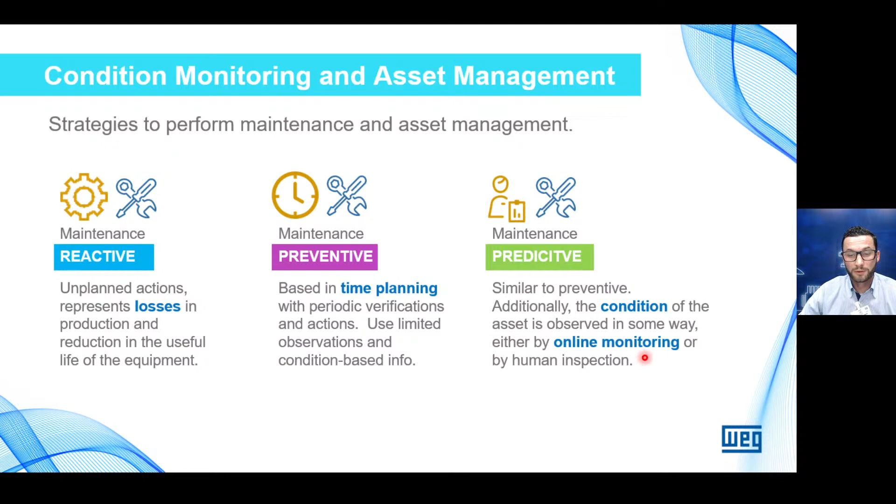Moreover, we can use the technology to perform predictive maintenance. It's similar to preventive, but we can also see the condition of the asset using online monitoring or human inspections. And the Motion Fleet Management solution is designed to help with these 3 steps of maintenance.

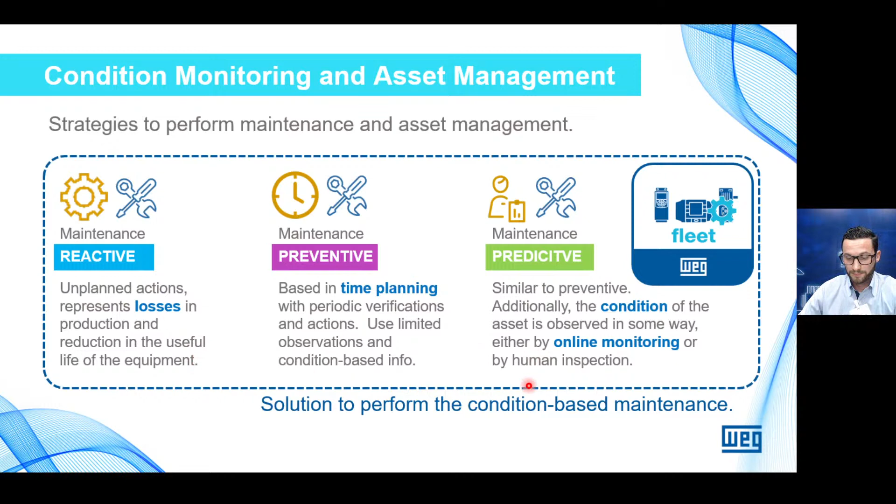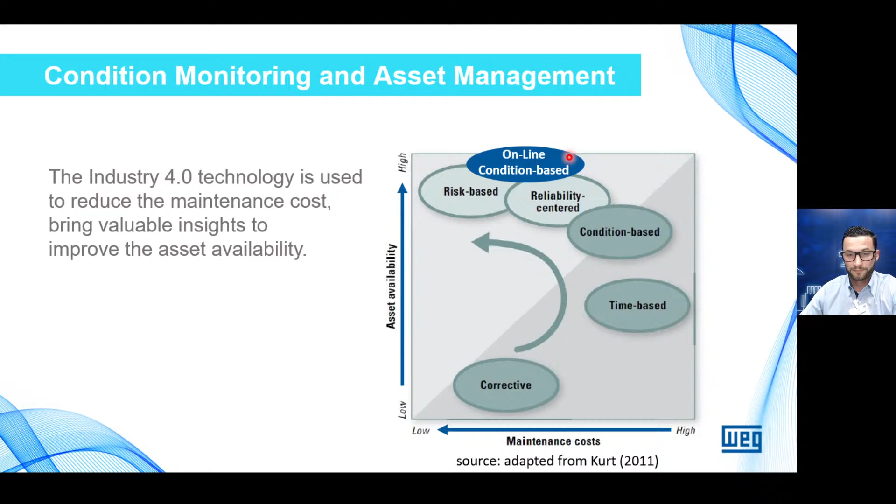Looking at the theory, when we are using technology, we are looking to reduce the maintenance cost and get asset availability. When we get online monitoring and condition-based actions, we are reducing the TCO, the total cost of ownership. And to get a better understanding of what the new technology is and what is different from the traditional methods, we would like to use this table.

When we are using the traditional methods, usually we need to take care with workforce safety. We also need installed instrumentation to get online measurements, and usually this cost is high. To perform the analysis and diagnosis, we need expert knowledge in every measurement and also in every analysis. It means this application is less generalist and more specific.

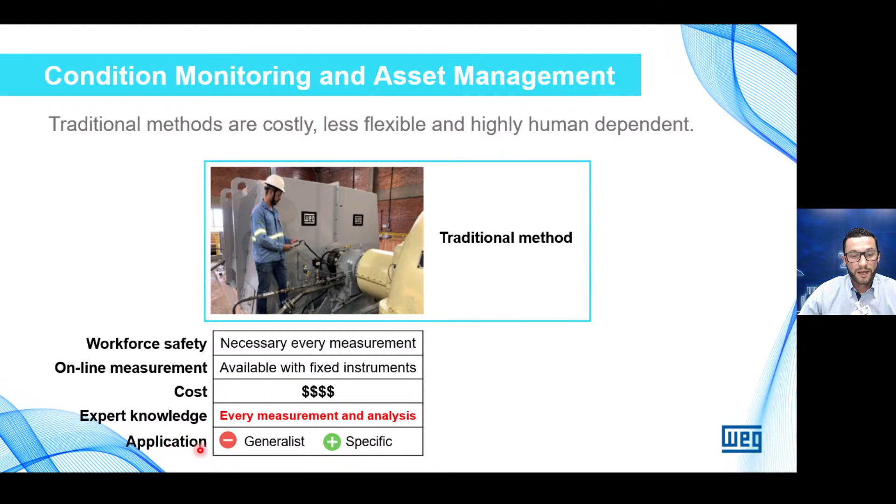Comparing with Industry 4.0 technologies, we can perform autonomous scans. The measurement is online, and using smart sensors and wireless sensors, we can reduce the cost compared to traditional methods. Here we can take advantage of algorithms, so the expert knowledge can be embedded and scalable inside the sensors and at the cloud. It means this application is more generalist and less specific. In this case, we can use Industry 4.0 technology to sense the fleet to understand where the experts and the workforce must focus.

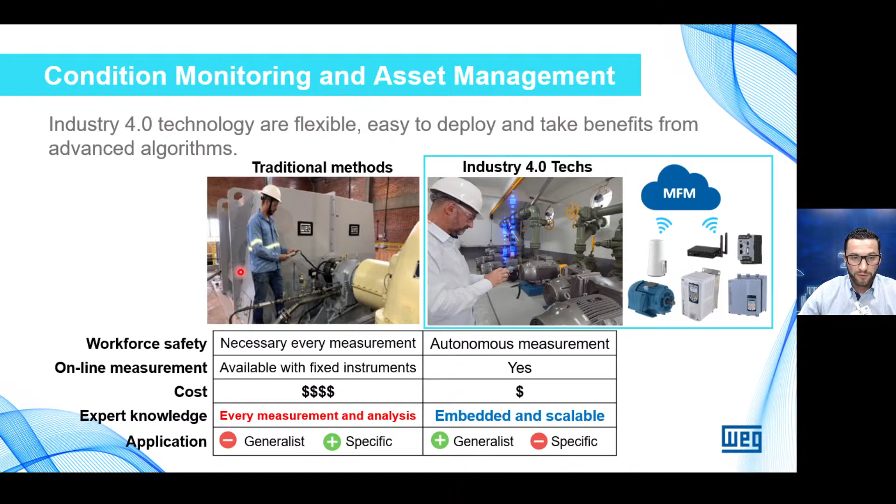So in 2018, WEG launched the WEG Motor Scan. Our customers started to use our gateway, our motor scan, and our digital solution. We improved the platform, we improved the cloud solution with the motor fleet management. Other customers started to use it and take the benefits of this solution. We created the fleet reports. We created the first WEG product using artificial intelligence and machine learning.

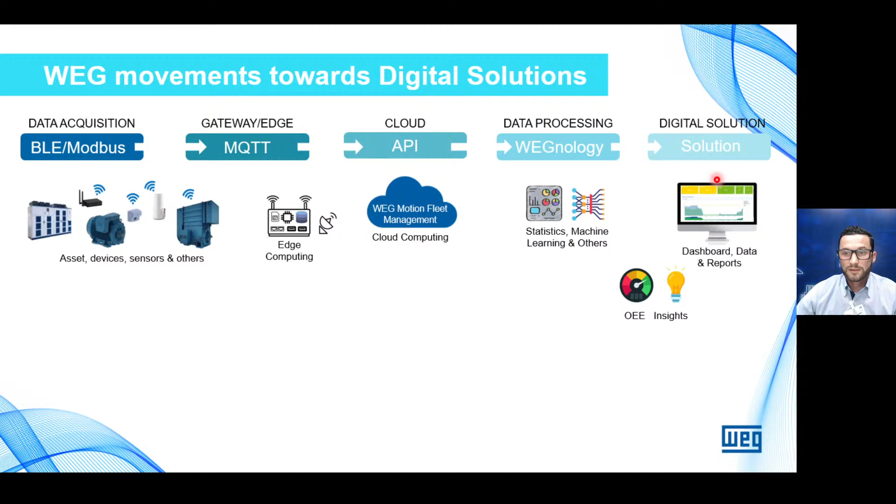So how did we start this? We know a digital solution starts from the data acquisition. Also, we need the gateways. We need to create the cloud, the data processing, and the solution. We started to create a team. So we looked first for a technical approach. And here we started to engage our team, creating new positions and getting new experts to create this.

After that, we focused on cloud, which means software and information technology. And also another challenge was created here and overcome. We took cybersecurity, data architects, data scientists. Everybody was working very hard to get this solution to the next step, to the next level. And finally, the business approach. So we have been working for the last 5 years to create this solution, to make it reliable, robust, and technological.

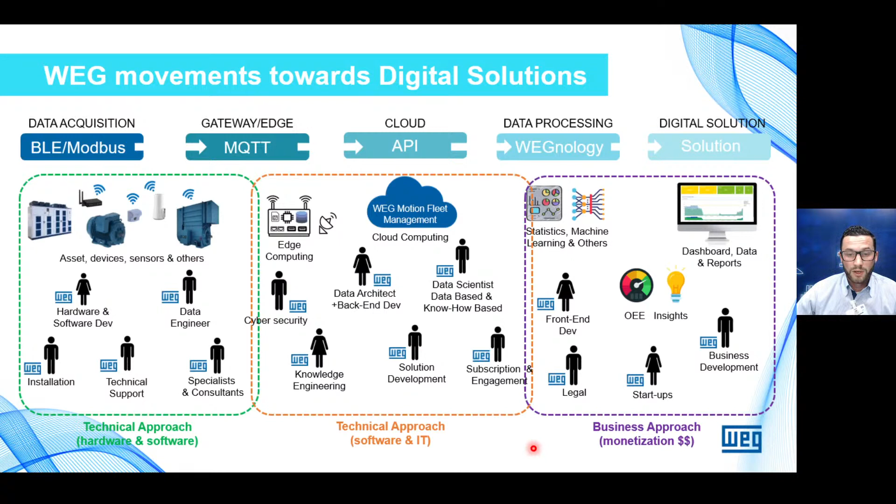And of course, we also got some technology partners outside of our company. Recently, WEG bought V2COM, which is a connectivity company. Also, we now have at the company BirMind, which is focused on analytics and artificial intelligence, MVisia, focused on computer vision with artificial intelligence as well, and PPI Multitask, which is a manufacturing execution system focused company.

So, to create the motion fleet management software, WEG decided to use its own IoT platform, which is the WEGnology. Any WEG customer can use the WEGnology to create their own solution, using some hardware available in the market to get the data and using our cloud to create the dashboards, the workflows, the data lake. Everything that you need to create a digital solution is available in WEGnology. So WEG created their own sensors and gateways inside this motion fleet management solution using the WEGnology.

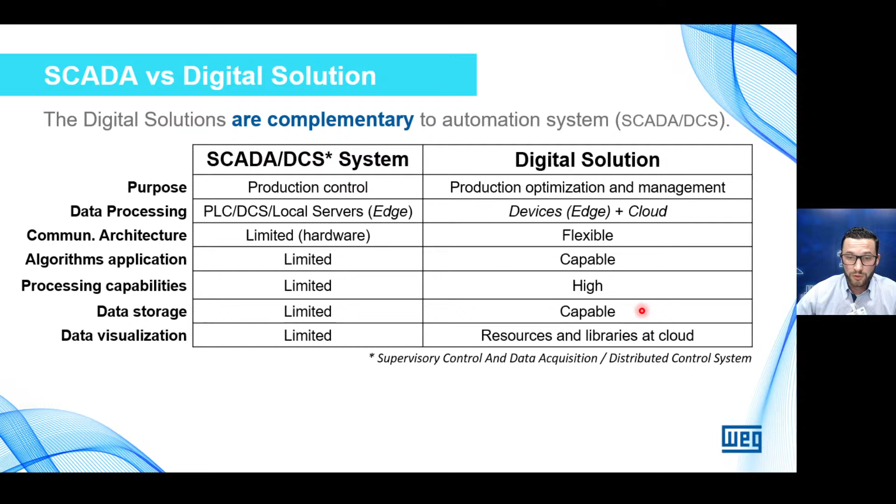We also can store that data, and the visualization is easy because we have a lot of resources and libraries available in the cloud. And here we have the second note from WEG: SCADA and digital solutions are not competitive. They're complementary.

So here we have the concept, the design of the MFM, which is in layers. The first layer is the assets, which WEG has been producing over 60 years: electric motors, gear motors, variable frequency drivers, soft starters, smart relays, medium voltage variable frequency drivers, and medium voltage large machines.

To use the MFM, we need the scan and gateway layer. Here we can use the motor scan and gateway, the drive scan for low voltage, the drive scan for medium voltage, and the large machine scan.

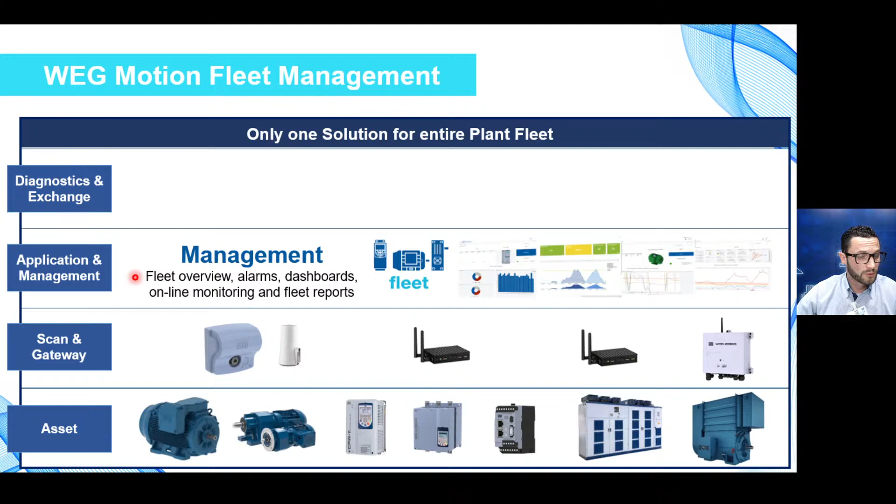The third layer is cloud, is software. We call it the management layer. Here we have the fleet overview, the alarms, the dashboards, the online monitoring, fleet reports, and more.

The fourth layer is the specialist. Here we have advanced algorithms in order to diagnose failures and consumption analysis. We also have, in the fourth layer, the exchange, which is data integration. We can connect every piece of data that we are collecting from the assets to a third-party system, meaning the ERP or the automation system. No matter what, using REST API, we can connect our data from MFM to your system.

An important remark: this solution is under continuous development. We are improving step by step, day by day, hardware and software.

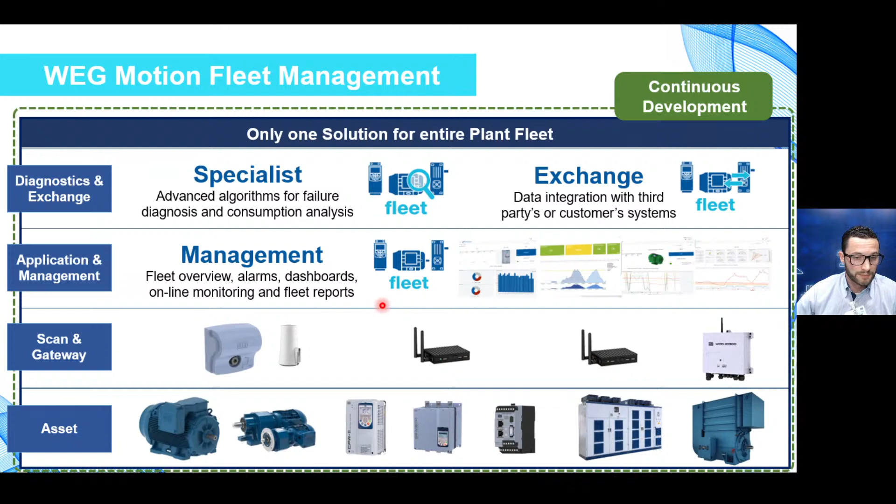So, taking a brief view of the solution, we have the management, specialist, and exchange solution in the cloud, and we have the assets, sensors, and gateways at the edge. We are processing data to get valuable insights for your fleet in the MFM solution.

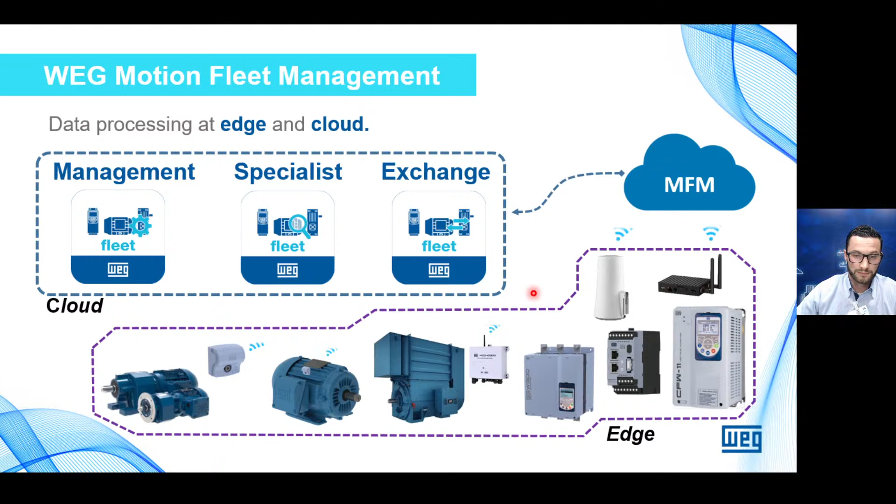So, before taking a detailed look inside the solution that we will have in the next slides, I'd like to show you the roadmap of what we created in the last years.

We started in 2019 with the IoT platform, which is a dedicated platform for motor scan. After that, we created the WEG Digital Solutions department inside WEG and started to create the WEGnology and the motor fleet management.

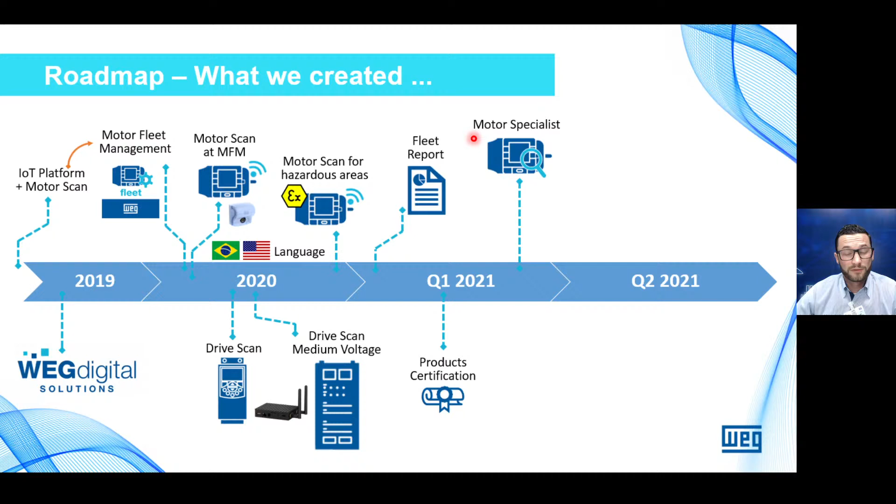During the last year, we improved the certification of our products and included the drive scan in the fleet monitoring. During the first quarter of 2021, we created the fleet report, improved the product certification, and created the first artificial intelligence product from WEG, the WEG Motor Specialist.

During the last quarter, we got the subscription management feature inside the solution. We launched the WEG Motion Fleet Exchange module for data integration, and we changed the name from Motor to Motion Fleet Management. After that, we did the overseas launch, so the solution is now worldwide available.

Also in the last quarter, we did asset prioritization for release, making it compatible with connections for soft starters and smart relays. For this quarter, we did the drive specialist launch, improvements in the fleet report, a Spanish language release, and much more.

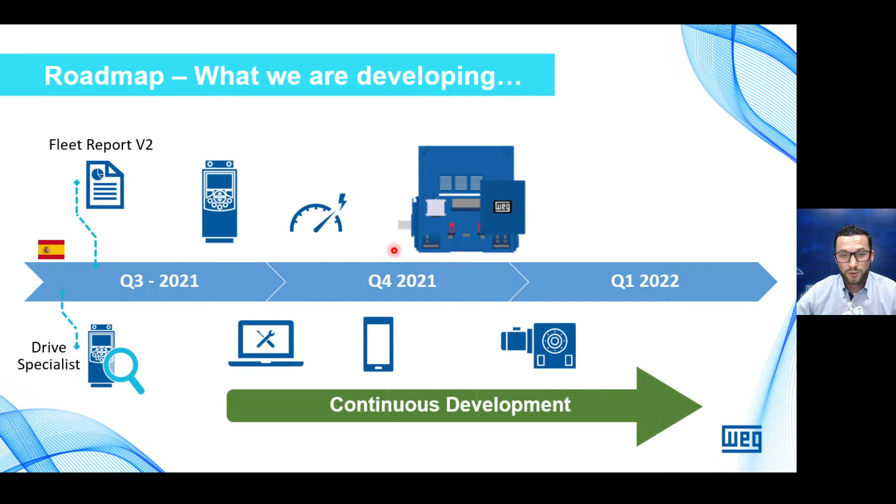As we know, this solution is under continuous development, even with hardware and software. So keep in touch with our news to see the new features that we are creating and releasing.

Now, we'd like to show you a real case here in Brazil. We have a factory, the wiring factory, which WEG uses as a dual strategy. We are creating this solution to use internally inside our factories, but also to improve it to offer to the market.

So here we have more than 300 sensors in our fleet, and this is used by our maintenance team in order to see which production line needs support. It is changing the production day by day, improving the overall efficiency of every piece of equipment.

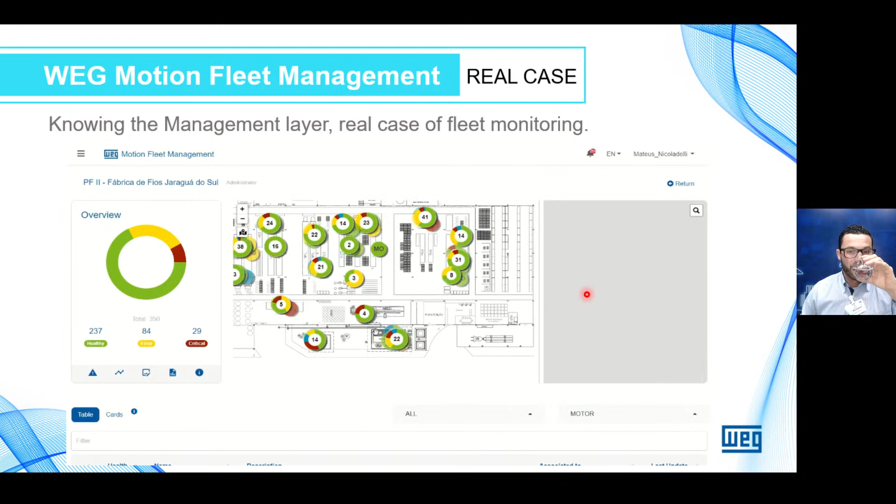Sorry guys, my voice is not helping me today, okay? But we can go forward, no problem.

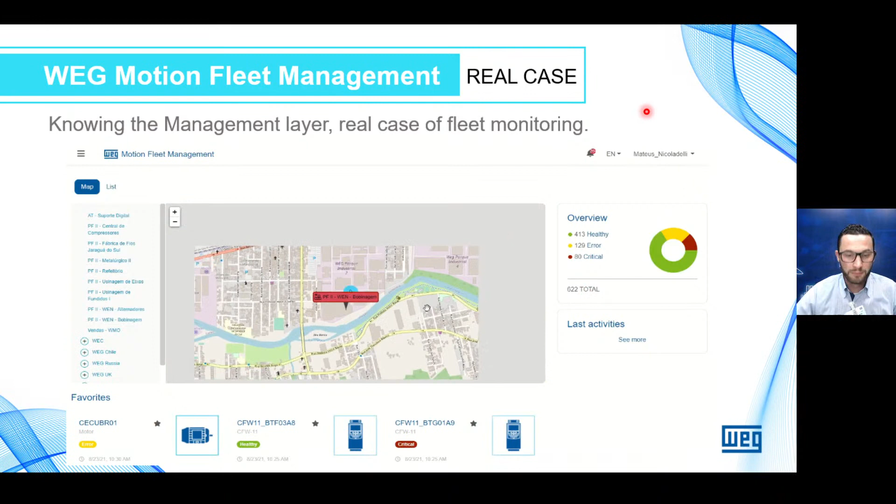Here we have two cases. In this one, we are looking at a temperature issue. We saw an abnormal trend of temperature, and after the maintenance event, the cleaning of the fan cover, we got a normal temperature again.

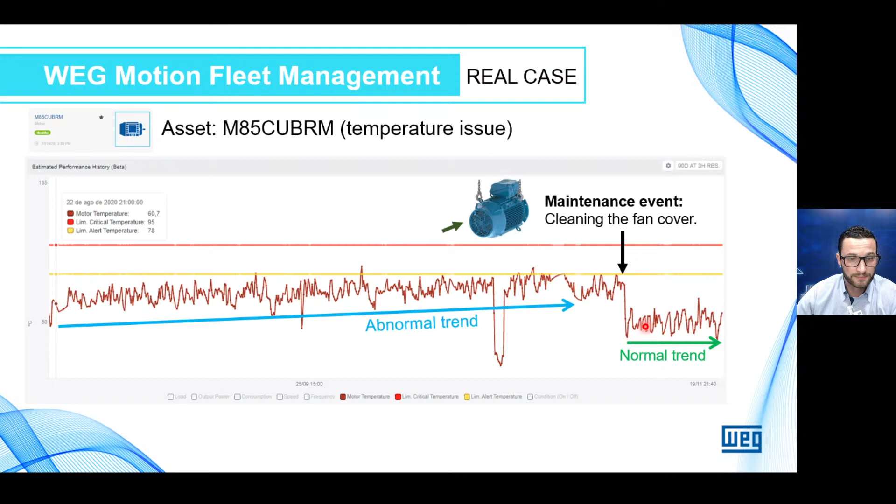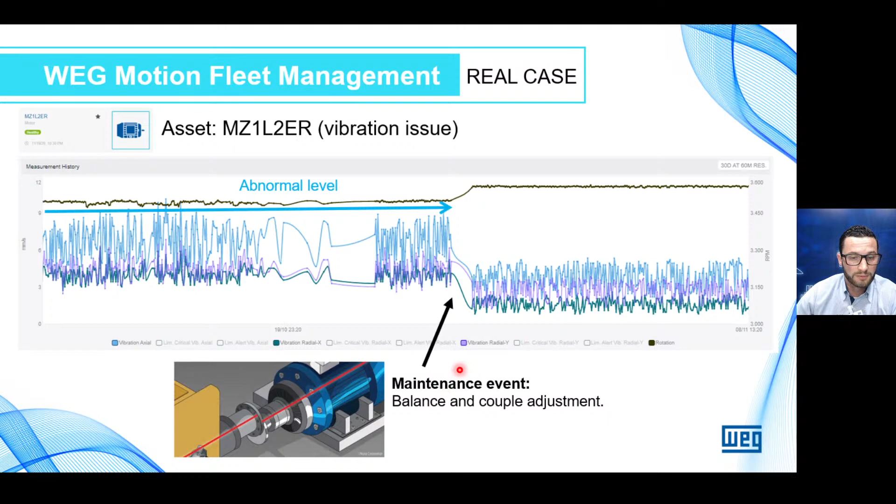The same we saw in vibration with this asset. Abnormal values of vibration were noted, and after the maintenance event, we got a normal trend again.

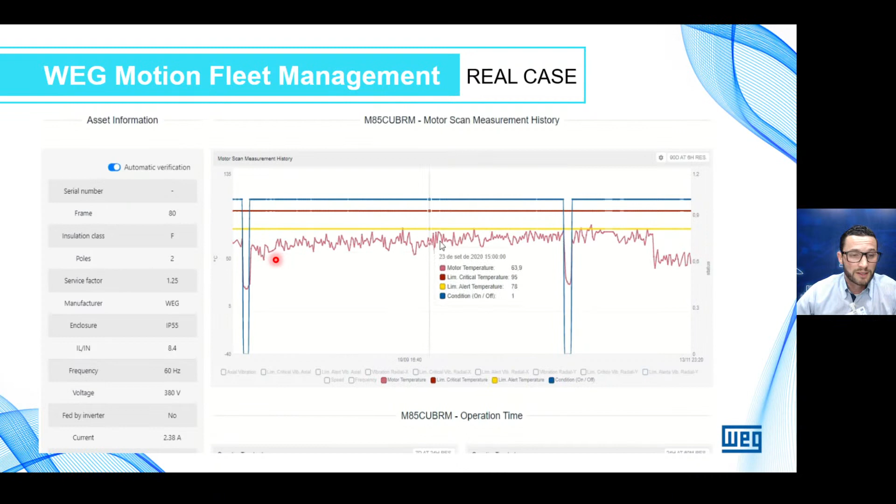And here I'd like to show you this data inside the solution. So here we have this motor. We can interact with the chart, and here we see the temperature increasing over time. So this is the temperature issue.

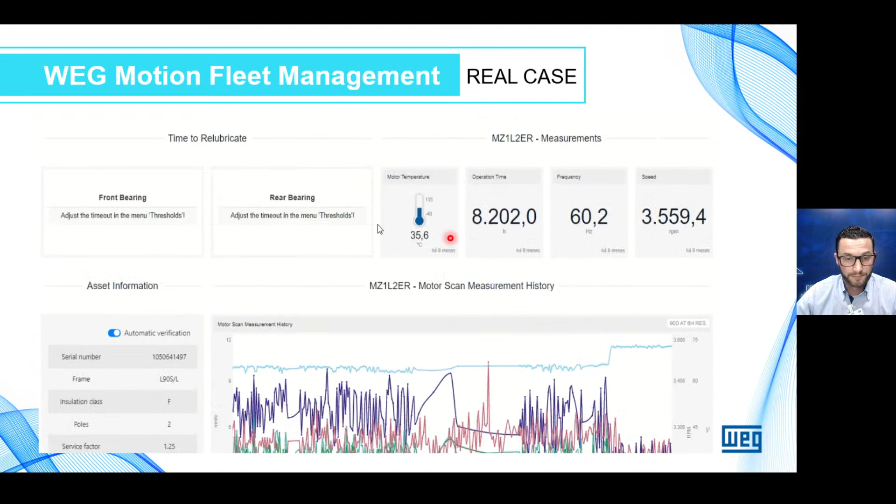And now we have the vibration. This is another asset, and here we have vibration levels near 9 millimeters per second. The maintenance team noted this high vibration using the motor scan and the motion fleet management solution and did the adjustment of the alignment. After doing this, they got normal values of vibration.

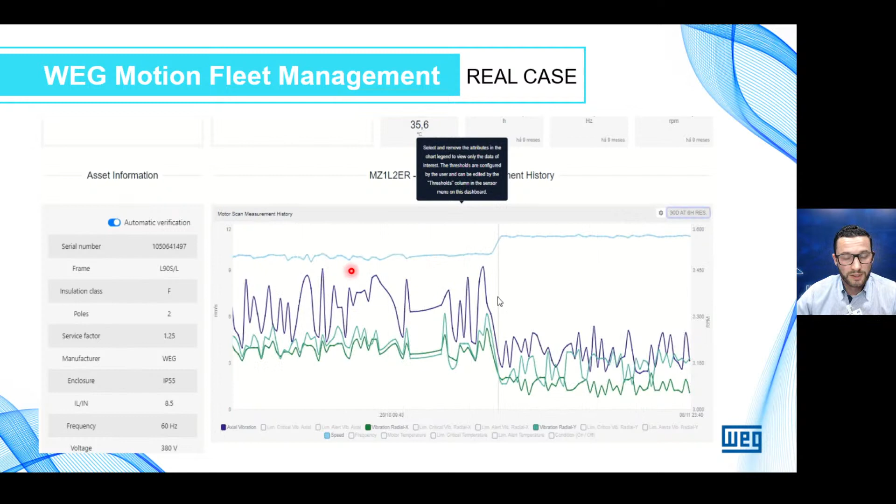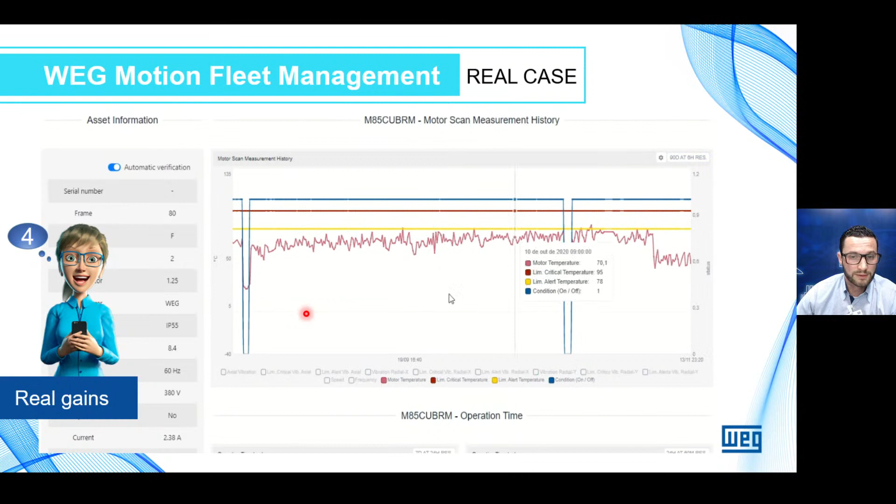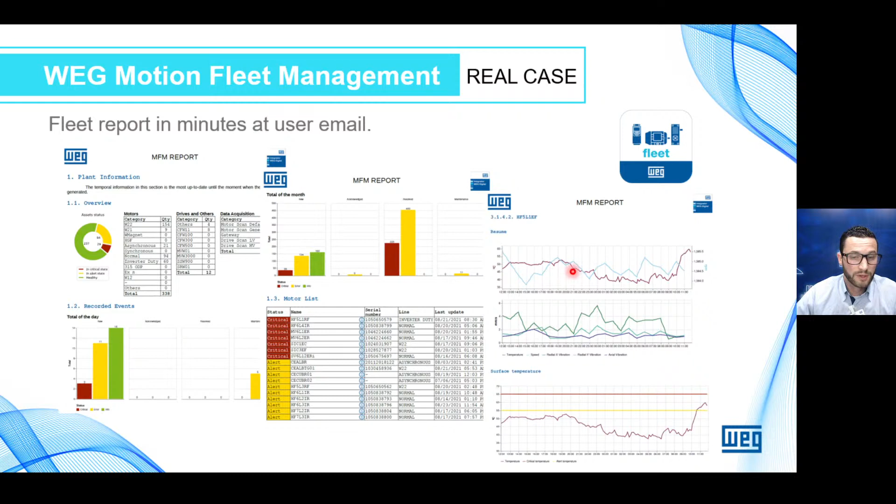So here we now get the idea that the motor scan using the gateway and the app, and the Motion Fleet Management solution, can give you a good idea how your fleet operation is performing.

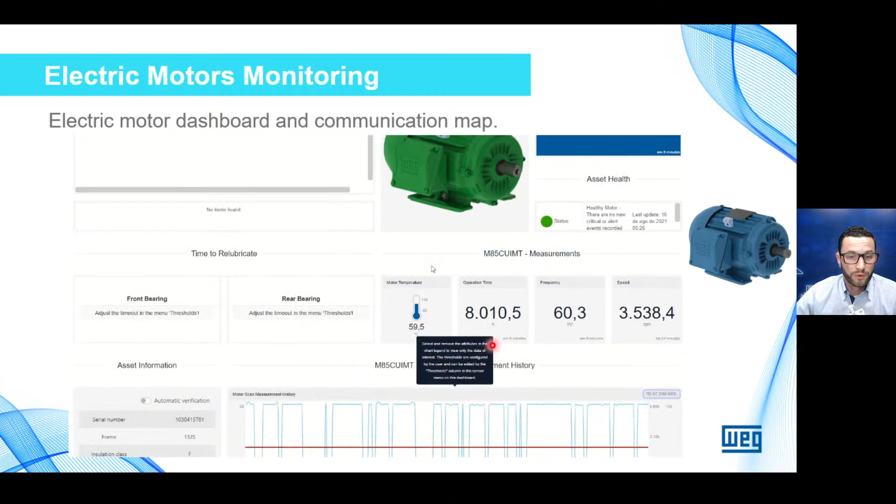Here we have the dashboard from the motor scan, where we can see the operational time, the speed of this motor, the temperature and vibration, and the motor data from the registration process, showing operation time by day and by hour. We can make adjustments in the chart to get a better overview of the data.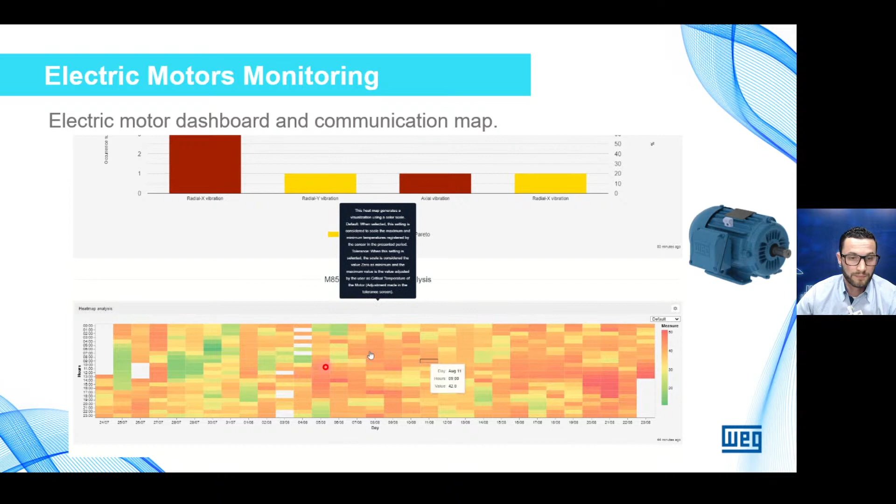Using the specialist module, we can have diagnosis analysis and also power consumption. Clicking on this part of the dashboard, we can see the specialist module, which gives analysis and indication of unbalance, misalignment, bearing failure, external failure, and unknown failure. In this case, the algorithm is indicating external failure.

It means when the motor is stopped, there is a high global vibration value, and that's not good, because you need to understand that the bearing only has vibration when the motor is running. So if you have this vibration with a stopped motor, it means there is an external vibration. The algorithm is also adjusted to see patterns inside the data to indicate if the failure is from another cause.

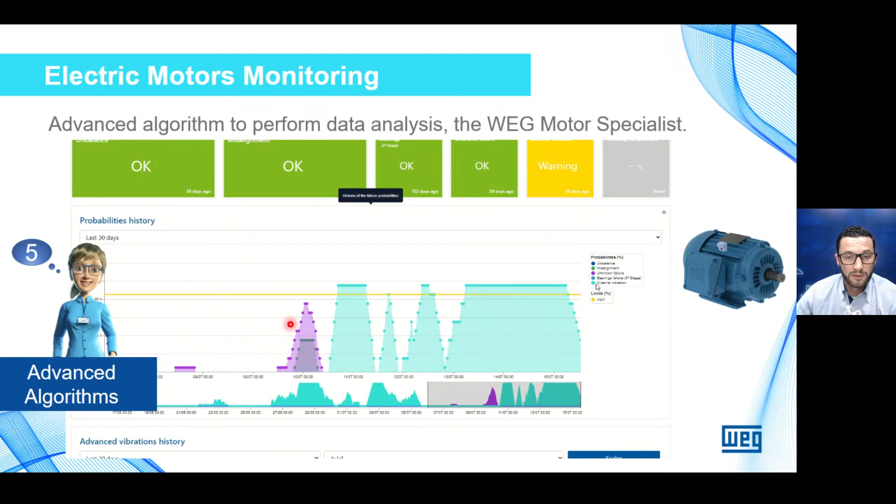So here we have the 5th note of WEG. Advanced algorithms are used inside the MFM solution, designed by WEG experts to help you during your fleet operation.

Here we have one case from a WEG factory where the motor scan and the WEG motor specialist diagnosed a bearing failure. This was the picture after the maintenance activities. We received the indication from the software, performed the maintenance, and confirmed the problem was there.

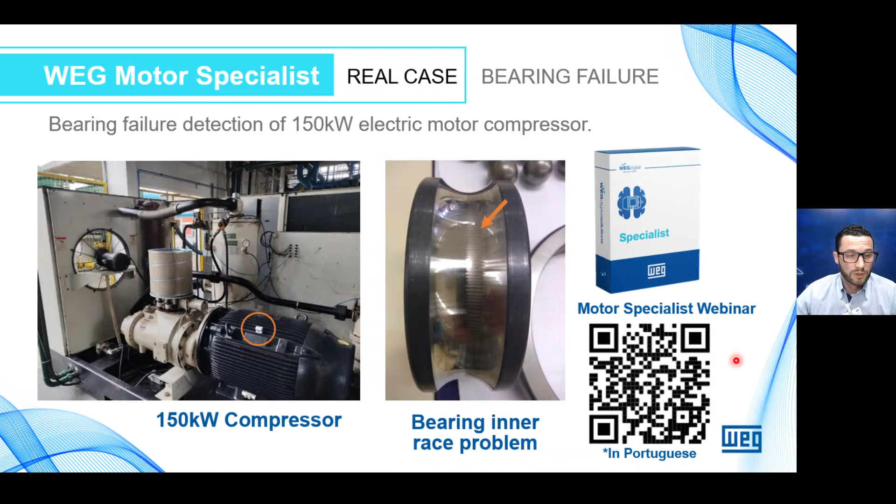So here we have the WEG motor specialist, which uses advanced algorithms to perform autonomous diagnosis and also consumption analysis. To see more about this product, take a look at our product website.

Now we can also take advantage of Motion Fleet Management software and solution for variable frequency drives. To connect medium voltage frequency drives or soft starters, we need the drive scan.

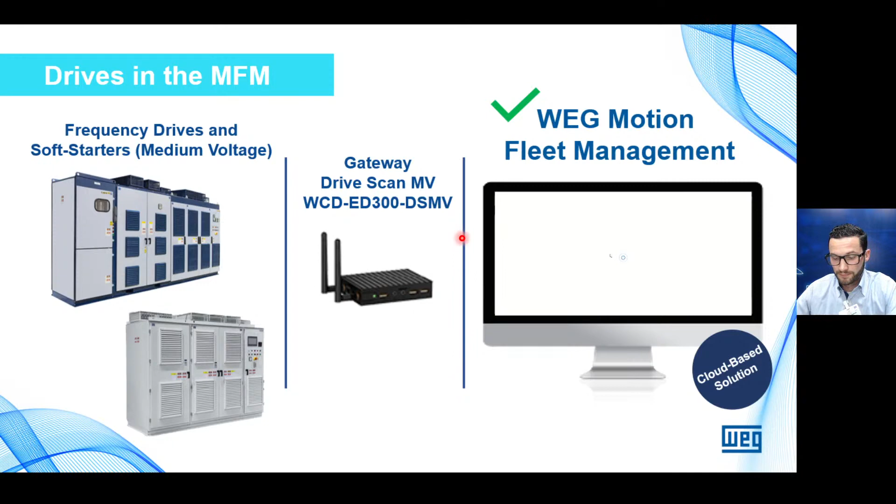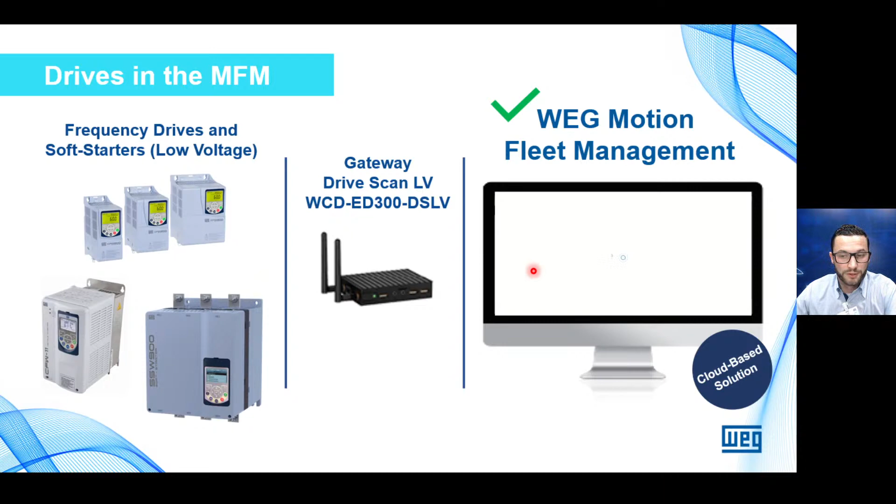For low voltage drives, we also use the same gateway, but with a different name: drive scan for low voltage. This is the product we use to connect with our drives and send the data to the Motion Fleet Management solution. Here we have the dashboard of the VFD.

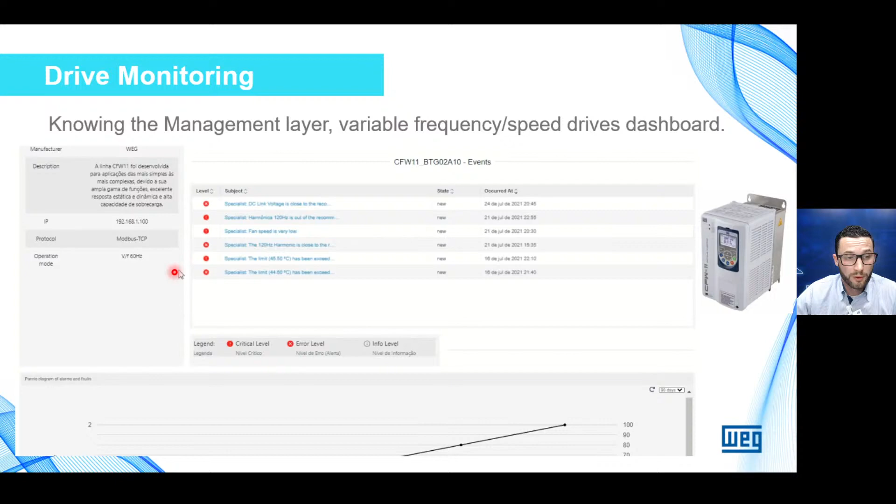Using this monitoring, we can see the current, the motor speed, and the voltage in the inlet or DC link. We have some charts comparing the temperature and the output, which is a correlated graphic. We can also see the period that this drive is in operation, disabled, or in failure, and we get the temperature from the rectifier and the IGBT.

We also have an important feature, which is parameter backup. Using the drive scan, we can get the parameters from the drive and set a reference in order to make a comparison with the current parameters inside the drive. Using this feature, you can very quickly see if someone changed a parameter.

So here we have the 6th note of WEG, which you can use to manage the parameters of your drives fleet.

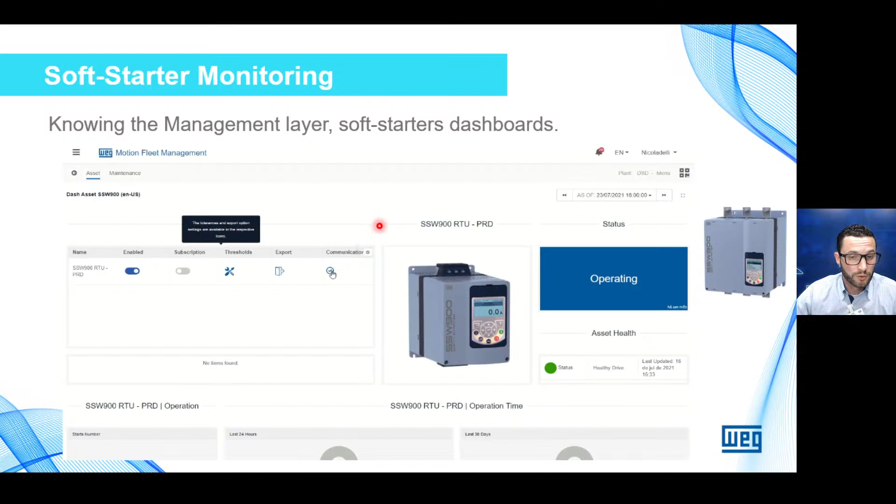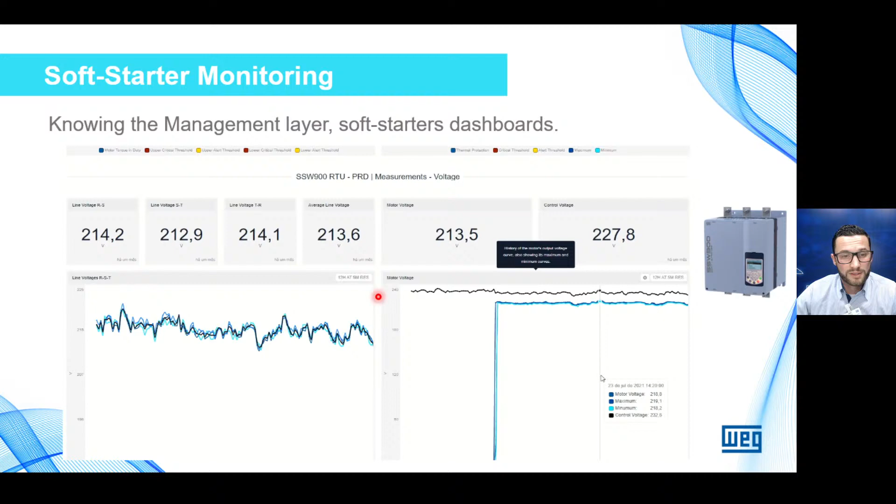We would also like to show you the dashboard for the soft starter. In this case, we can see the number of starts, the last 24-hour operation, the current, voltage, thermal protection, and motor torque. So every piece of data available in your soft starter, we can see in the dashboard, and we can manage and take advantage of this technology to make online monitoring.

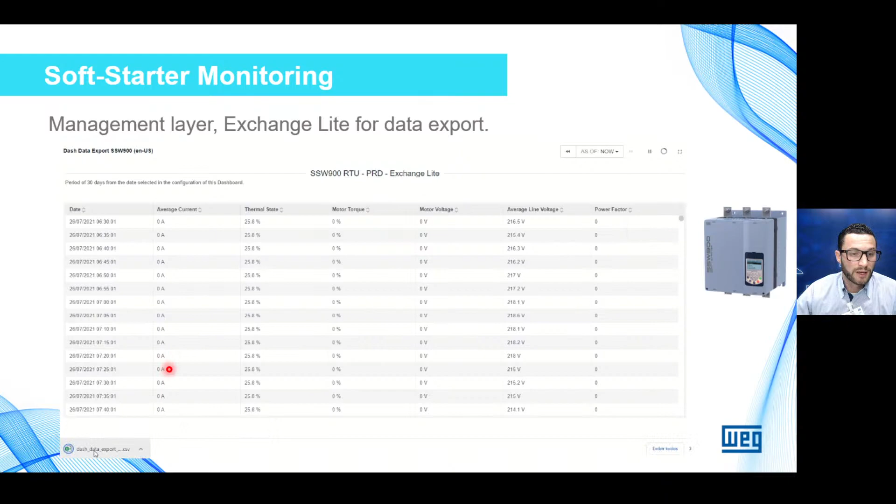Another important feature is the Exchange Lite for data export. Clicking on this part of the dashboard, we can access the Exchange Lite dashboard, where we have the last 30 days of data from your asset. Clicking on this part, we can download this data and save it on your computer.

So here we also have available the WEG Drive Specialist, which uses algorithms designed by our experts in order to improve the diagnosis in your fleet. To have more information about this product, please use the QR code.

Finally, for this webinar, I'd like to present the monitoring of electric motors or feeders using the Smart Relay. This product can be used to sense voltage, current, and IOs, and you can connect this device to MFM. Here you can improve fleet monitoring even with motors that are not using drives.

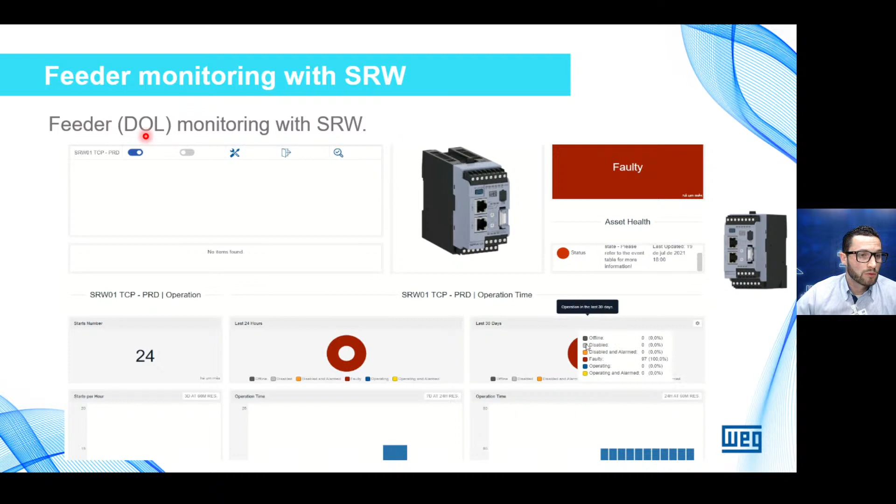You can get the same monitoring as you have in a VFD or soft starter using a Smart Relay. Here we have the dashboard of a direct online start, with the number of starts and operational time, just as we saw in other dashboards. Thermal protection, unbalanced current, voltage, everything available in Smart Relay, you can see in this solution.

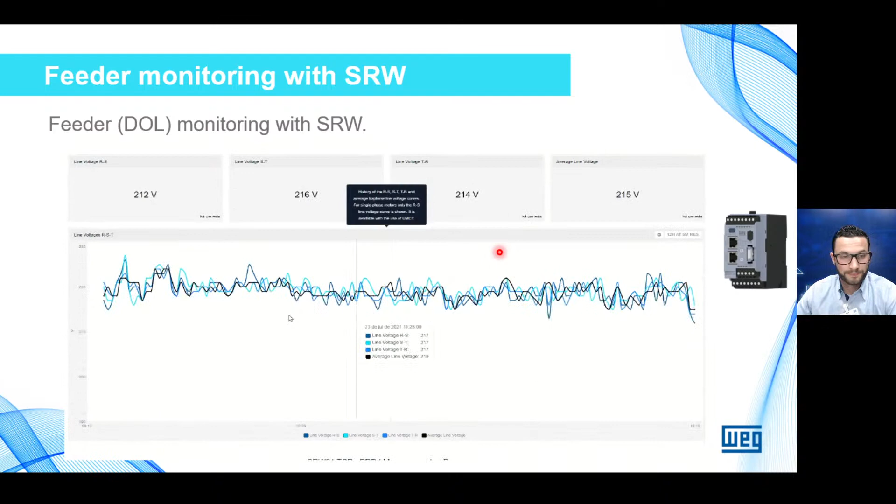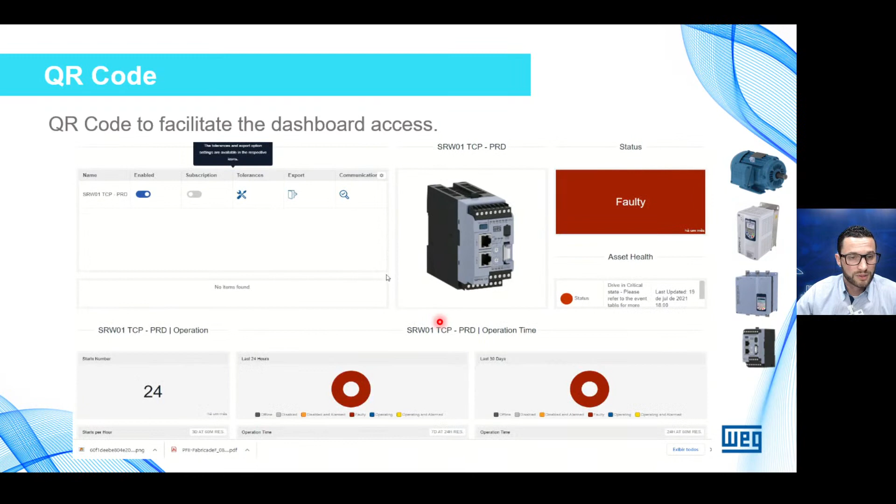For this webinar today, I'd like to show you another feature that is available, which is the QR code. In this part of the dashboard, you can request the QR code of this asset, print it, and attach it in your industry beside the asset. Your team can scan it using a smartphone or tablet and go directly to the respective dashboard. This feature can help accelerate the process to see the data available in the MFM.

So we are finishing our webinar, and to close it, I'd like to remark on the benefits and advantages of our solution. Using this, we can leverage condition-based maintenance. We also can support operational decision-making because we are using data. Doing this, we are also reducing the total cost of ownership. We can get important insight using a specialist module for motors and also for variable frequency drives.

We can use online monitoring for the entire fleet using just one solution. You can get effective communication using notifications and fleet reports. This kind of solution helps mitigate unexpected failures and shutdowns. And another important remark, you can get workforce safety because you are performing online monitoring and optimizing workforce activities.